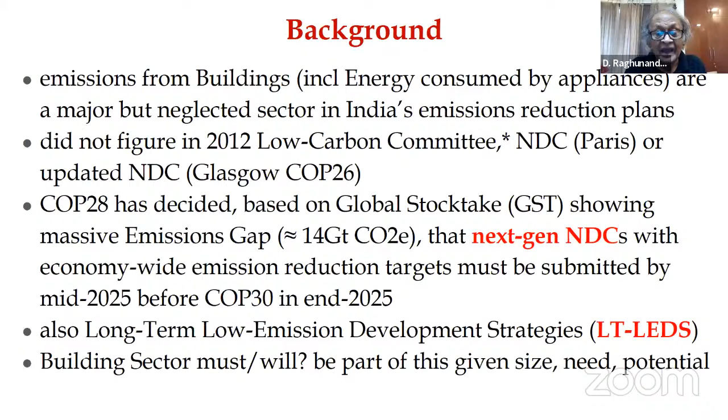And I can't see that we will be able to do that without taking the building sector on board, because buildings are a major part of the emissions profile of the country, which is currently about 25% of total emissions. And this is in a context where roughly 50 to 70% of building stock by 2050 is yet to be built.

We've got more than double of the building stock today still to come up, and we are already at 25% of total emissions in the building sector. I've given some figures here of emissions from buildings, largely drawn from C-STEP's study and modeling, which essentially says that almost the entire carbon budget—the amount of carbon India has between now and 2050, the space in the atmosphere—will be used by the building sector alone. Or since it will not be, that means we'll exceed our carbon budget by a lot, and that's clearly not going to be allowed by the international community.

When we talk about the building sector, I want to emphasize that building sector emissions consist of two parts. One is what's called embodied emissions—that is, emissions contained in materials that go into buildings, into cement, concrete, etc., and emissions from the construction industry, the transport of these materials, the removal and handling of waste and so on. These are called embodied emissions.

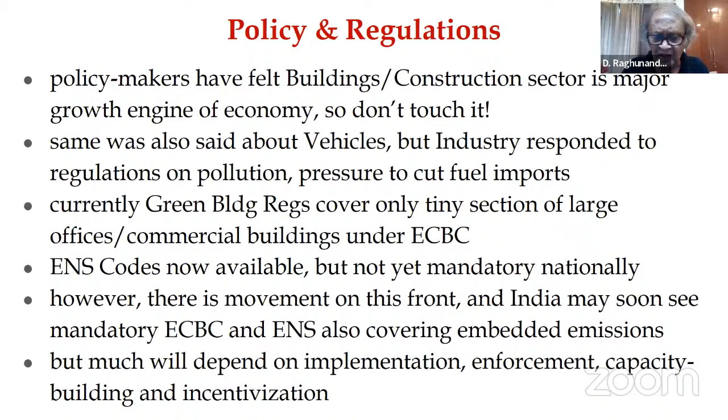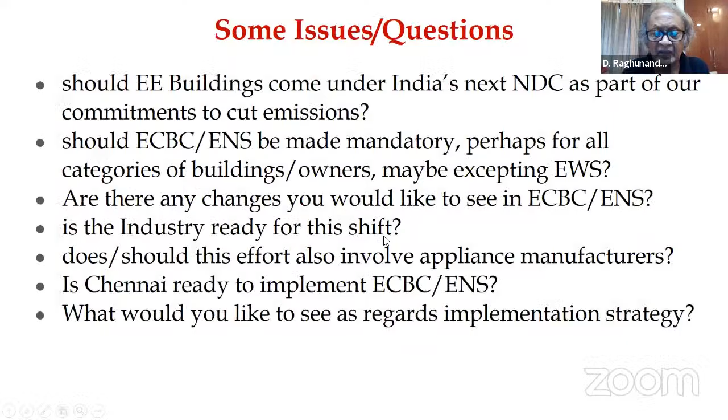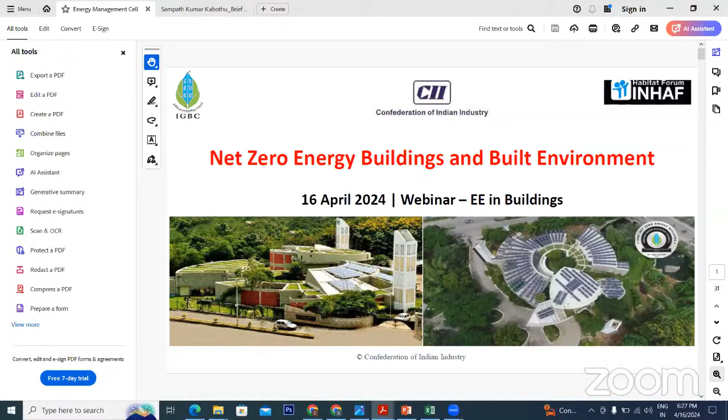Sir, thank you very much for offering this opportunity to CII IGBC for this presentation on net zero energy buildings. I hope you are able to hear me. Yes, yes, we are, please go ahead.

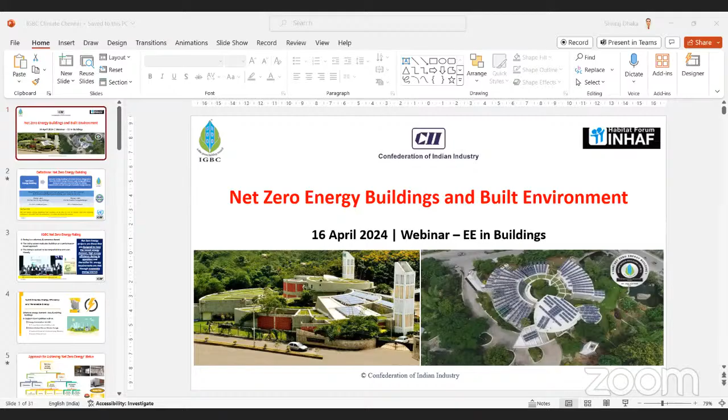This presentation is primarily about net zero energy buildings and the built environment. I got a message from Raghunandan sir that I should cover several parts of net zero energy which can make sense for Tamil Nadu or Chennai with regard to climate mitigation. So I've tried to cover several points, but I don't think one can do justice in 10 minutes covering every part of energy efficiency in buildings. But let me run the presentation. If you find any difficulty or need clarification, we can have a Q&A session.

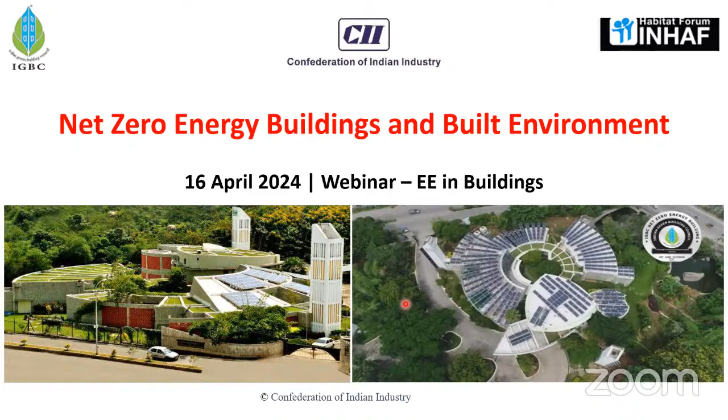The building you see here was the first green building in the country, and this is the headquarters of IGBC. When we started in 2001, this building was converted into green considering several measures. But in 2017-18, we realized there are many technologies available in the country, many more advancements which could be put into practice. So this first green building was converted into a net zero energy building after a lot of retrofitting of the completely air-conditioned system it had in 2001. Earlier the photovoltaic didn't completely cover the top, but later bifacial solar photovoltaic was installed. A bifacial system generates more energy compared to a conventional solar photovoltaic system and covers less space. So there are many advantages to bifacial. This is the journey we've witnessed from green building to net zero energy building, and this presentation will showcase how it can become a story for every building, not only our office, but a true message for every building with regard to net zero.

Then highest energy efficiency would be the focus for every building during design as well as in operation. After defining energy efficiency in every building, whatever is left out, this energy should come from renewable energy. So this is the definition IGBC has defined.

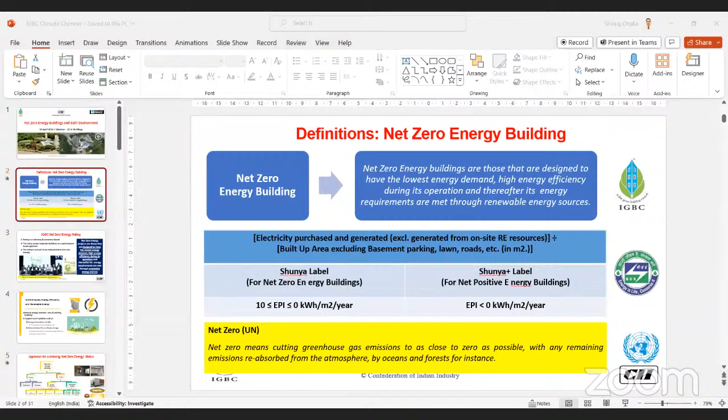But if you see the Bureau of Energy Efficiency, which is the nodal agency for improving energy efficiency all across the country, for the building sector as well as the sectors in industry - let me also jot this just a second - Bureau of Energy Efficiency mentioned that any building which just relies on a renewable source, but is only able to meet out or offset some part of it,

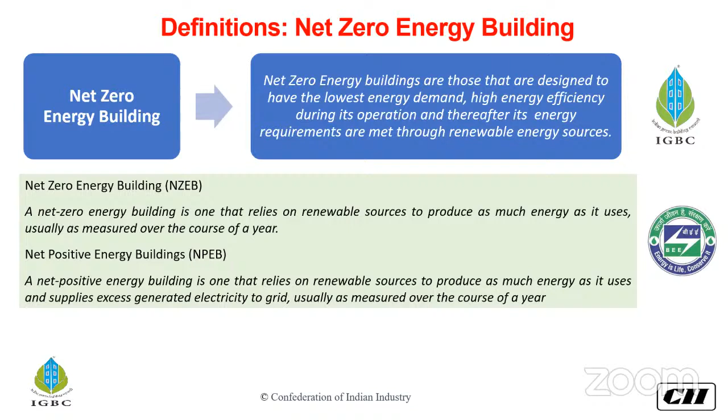it can become net zero energy. But some buildings surpass the total energy required for a given building and produce much more than the requirement - these buildings can also become net zero energy positive buildings.

If you see IGBC and Bureau of Energy Efficiency, both give huge importance to energy efficiency and renewable energy. But Bureau of Energy Efficiency has defined what building can be called net zero - the Shunya label is like the net zero building - through their energy performance index.

Energy performance index is very simple. We should have the total energy consumption for a given building and divide it by the total built up area, for our home or for commercial buildings. This should be less than 10 for commercial buildings, and for residential buildings it could be a little less than 10.

With regard to Shunya label plus, or net positive energy buildings, this EPI would be lesser than 0. This means whatever renewable energy we generate would completely offset the energy demand, but would also generate a little more than our requirement.

You can also find many other definitions. This one is listed from the United Nations, but the UN doesn't talk about net zero energy - they talk about the total carbon offsetting by any source of energy users.

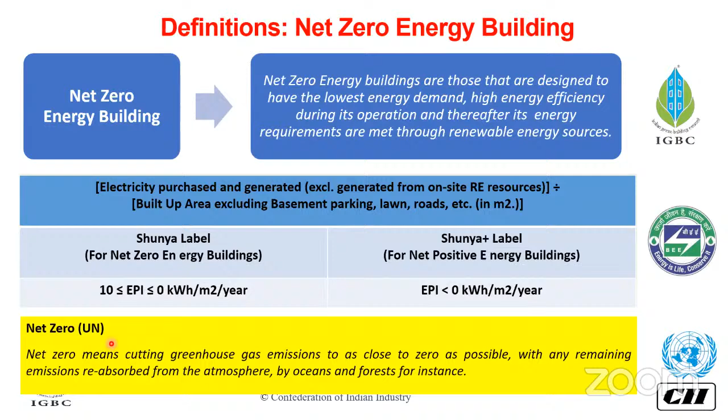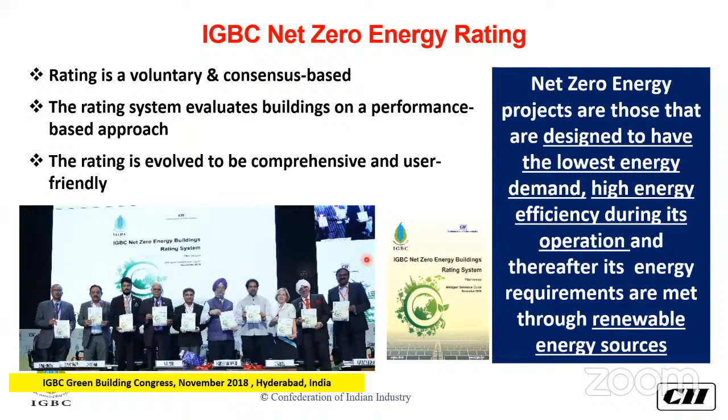This presentation would be shared with the team so they can circulate it with all the stakeholders. This net zero energy concept was launched in 2018, and today we have many projects all across the country. I will also showcase some case studies during my presentation.

So when we define net zero energy, our thought process was that this should also address several policies which are there in the country. Primarily, when we talk about net zero energy, we are also talking about energy efficiency and renewable energy. So energy efficiency is well defined under the Energy Conservation Act 2001.

ECSBC will not only address the energy part, it will also address water, building materials, indoor environment quality, commissioning of equipment, and how sustainability can be achieved through site selection or planning. So all these parts which are there in green building will also be part of the ECSBC, which would be revised very soon by the Government of India.

The second part addresses climate policies which are there on energy efficiency as well as renewable energy. So while adopting net zero energy, we are really confident about having huge benefits with regard to energy savings and having more and more penetration of renewable sources in every building typology.

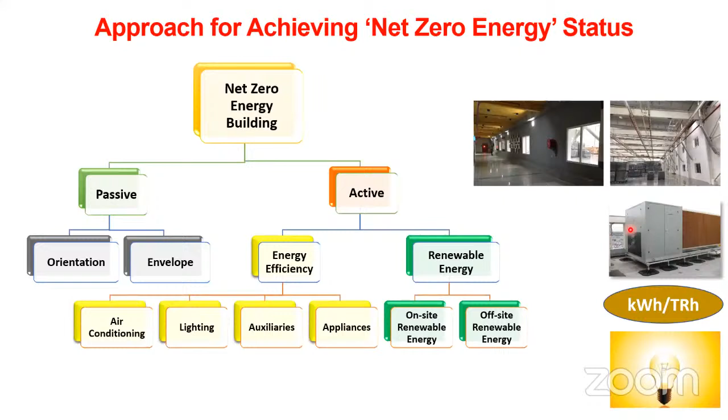I have put couple of things. This is also a passive strategy, like there are light pipes which are installed into the project, and these light pipes, they reduce the use of artificial light in corridors. Then there are some passive elements, although it would be difficult to use them in Chennai, but yes, they can also utilize good efficiency into the project.

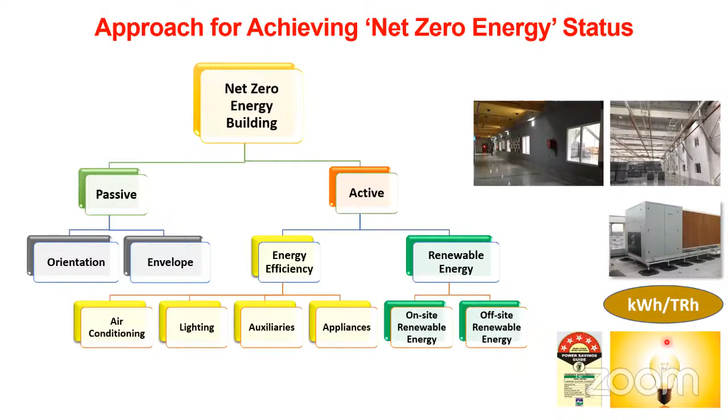So when we have a net zero energy certification, we consider several parts, and passive is by default integrated for new buildings, but primarily when we see the building growth, even Dr. Raghunandan mentioned like what could be the strategy for 2050. So today we have lesser new buildings and many more existing buildings. So there could be huge retrofitting opportunities for these buildings to become and demonstrate net zero energy. So we give more than 75% of weightage to energy efficiency alone, because energy efficiency pays back from day one. And then also try to fit like which retrofitting options can be better for the project.

I have showcased something here. Like many a time, old buildings they do have centrifugal fans, and today, most of the projects or most of the air distribution system wouldn't have a centrifugal fan. Either they have the EC fan, or more than EC, they would also have zero energy fan or axial fan, which doesn't have any energy losses there. You can also find like how they will have the smooth airflow. This is one example of like centrifugal airflow.

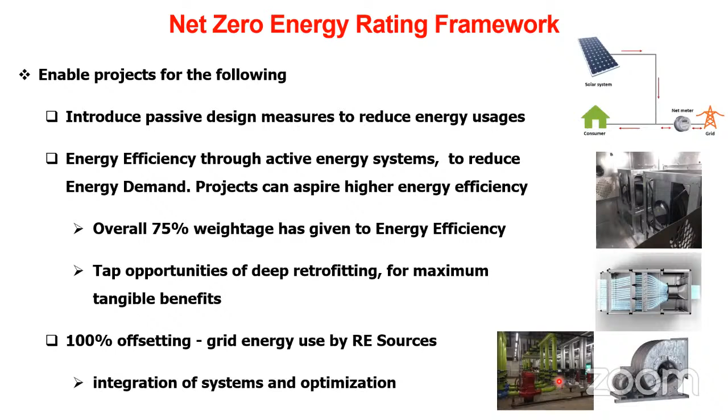And these are like pumping solutions which are really, really efficient. And there are a couple of companies, they are based in Chennai, those are offering this kind of solutions. So this is how we segregate them.

Let me tell you like how energy efficiency happens, which is having highest weightage in net zero energy. Some of the buildings, those we have rated, they were like having very, very high energy performance index in 2010. They did gradual improvements, slowly they had many retrofitting. And today their energy performance index is like less than triple digit, which is like 90 kilowatt or lesser than this.

Another message we would like to give you is like when we have renewable sources, it is not only like 25% weightage of renewable, but it is the overall weightage of 100-point scale into renewable energy for 25%. But it must have 100% of the requirement for a project to offset the grid energy used by renewable. It can be on site having net metering policies. Tamil Nadu is like good state with regard to solar policies. And second thing, if energy demand is so huge, cannot be computed by on-site, it can also have off-site by having wheeling also.

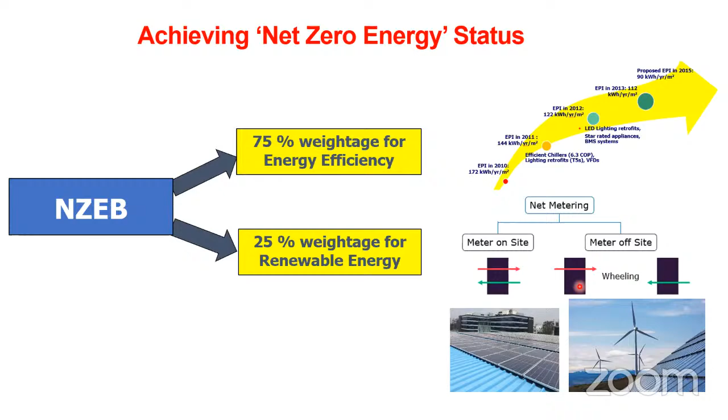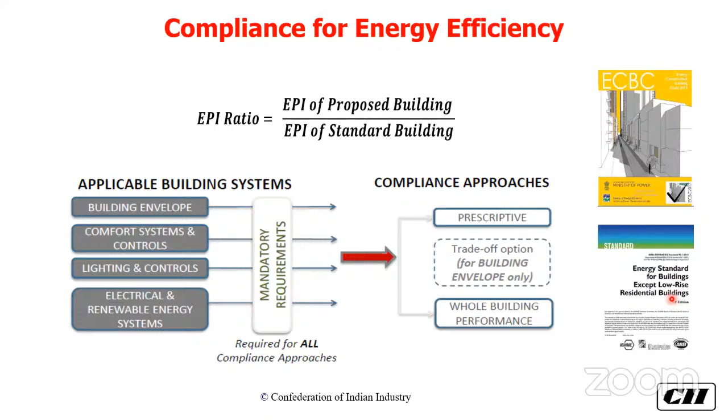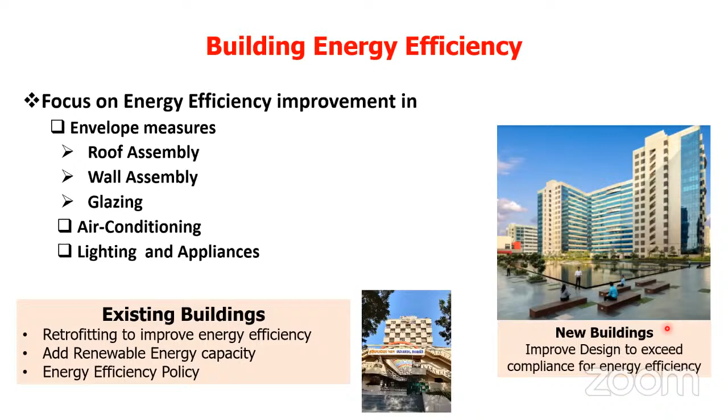When we talk about energy efficiency, there's the building envelope—roof, wall, glass—and then air conditioning and lighting. But with existing buildings, there are more energy efficiency implementation opportunities through retrofitting, and also to add renewable capacity. New buildings obviously have more design interventions, and these showcase how they perform better compared to older buildings which are not meeting code compliance.

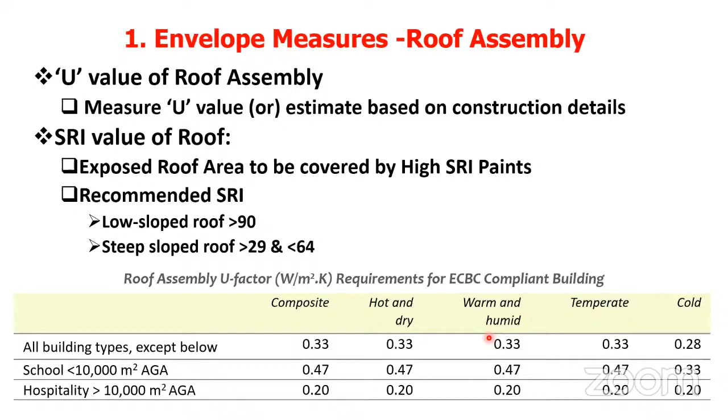These insulations can be created by many different options. Sometimes you don't need insulation—it can just be an air cavity. Sometimes an air cavity can be combined with a different type of insulation material, which are well known in every climatic zone or city.

Most of the time we design for worst conditions, but worst doesn't occur every time. So we should design buildings for part load efficiencies also, so that we get more benefit from the cooling savings.

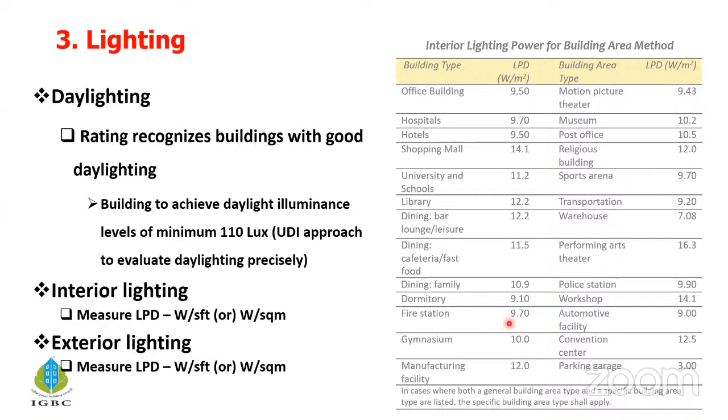Another part is lighting. Lighting is important because every space needs either artificial or daylight, or a combination of both. So we recommend having a lighting power density, which is defined for different building typologies in ECBC. It can be referred to—it's available online for everyone.

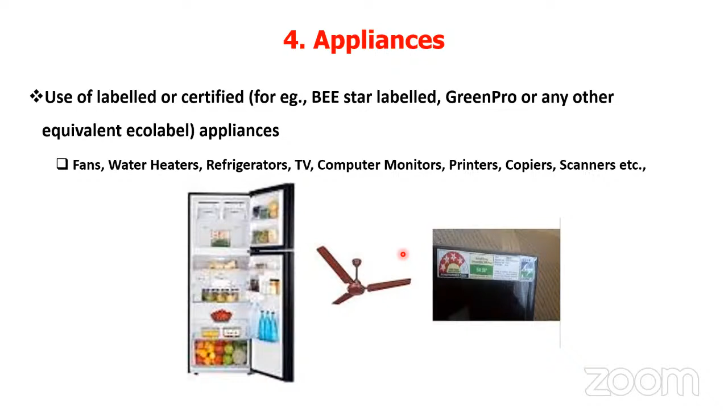The main advantage of using appliances with a star label is that every 2 years these labels are modified and upgraded. So whatever you purchased that was 5-star about 2 years back wouldn't qualify for 5-star now—it would become either 2-star, 3-star, or may not even qualify under the criteria developed by the Bureau of Energy Efficiency.

So let us understand how to calculate EPI to demonstrate whether a building would meet ECBC or not. Let's assume we have some energy consumption evaluated for a design case—this is the actual energy consumption for the building.

We have a built-up area of 2000 square meters. If we divide the total energy consumption of 130,000 by 2000 square meters, we get a design EPI of 65. Then the actual consumption is 100,000; dividing again by 2000 square meters gives an EPI of 50. When we calculate the EPI ratio—actual versus design—we get 0.76.

This means 50 divided by 65 gives an EPI ratio less than 1. This means the building qualifies for ECBC.

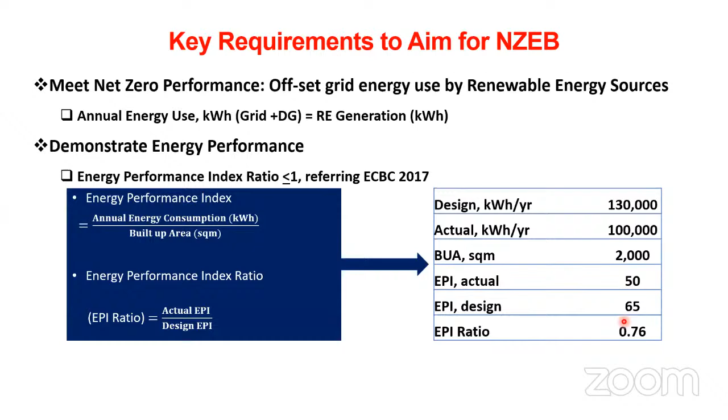This means this kind of building will not qualify, since it has more energy consumption in actual or proposed case compared to standard. So this building can't meet ECBC compliance. Here is a case which is the reverse of what we just discussed.

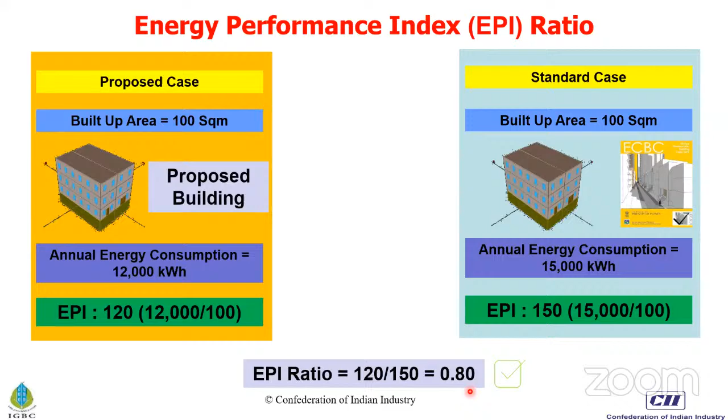It has more energy performance index in the standard case, like the ECBC case, than the actual case. So 120 divided by 150, your building is having EPI lesser than 1. This means this kind of building can meet the ECBC compliance.

Now let us talk about on-site and off-site energies. I'll run a little fast since I'm taking more time. On-site is one example which can have net metering and gross metering based on the policies which each state has. I don't think Tamil Nadu has any problems; it is very good with regard to policies for net zero or renewable implementations.

This is offsite. A project can put a plant outside their premises. They can have wheeling through the DISCOM or any renewable energy companies, and can wheel the power, which is green power, to offset the grid energy consumption.

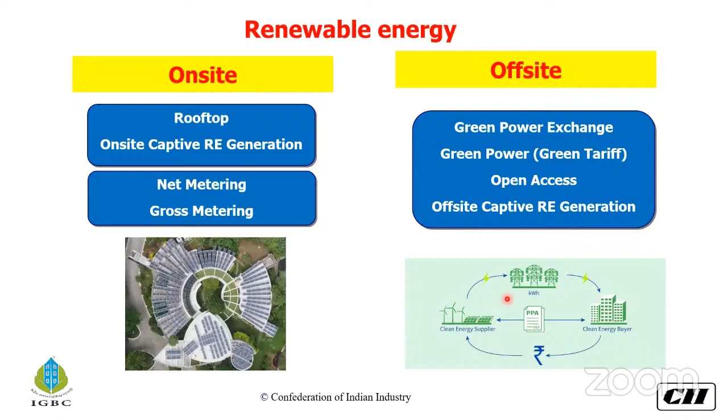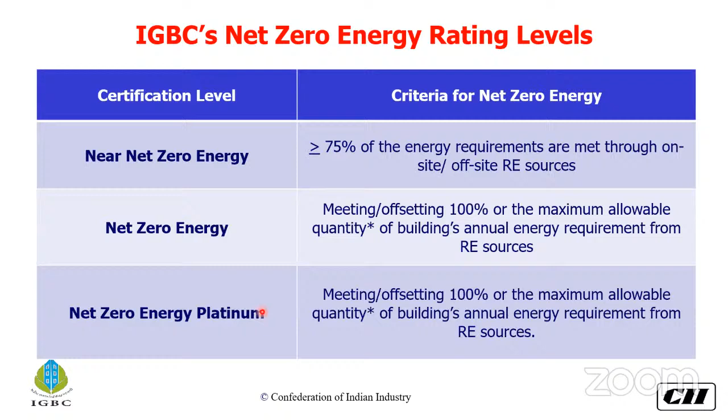So we have 3 thresholds defined for net zero energy. One is for any building which has 75% of its energy requirement met through on-site and off-site renewable energy; this building would be called a near net zero building. Any building offsetting 100% is called net zero energy, and net zero platinum means it offsets a little more than the actual requirement on an annual basis.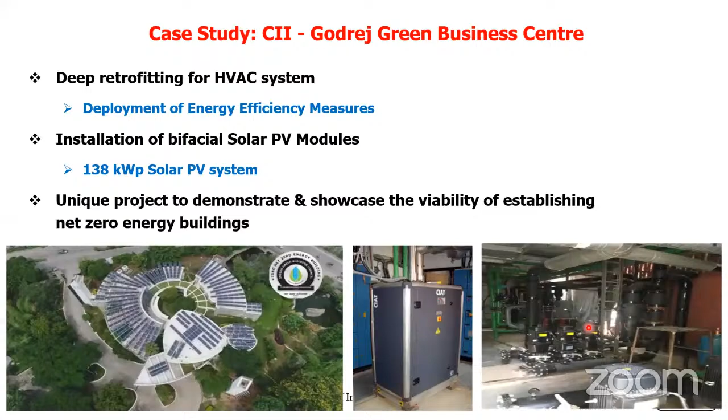You can see all the cooling systems we retrofitted with new ones, which are very efficient. But efficiency at 100% load isn't really important for us, because our office is never operated at 100% load. It mostly runs at 50-60% load or a little lesser. So we selected items which are best at part load.

This is the story of lighting. We retrofitted in 2017-18. You can see a number of lights, more than 211 fixtures, but when we retrofitted, we hardly had 86 fixtures, and their efficacy is very high. Efficacy is lumens per watt - earlier it was 60, and now it is 132. So this reduces the number of fixtures.

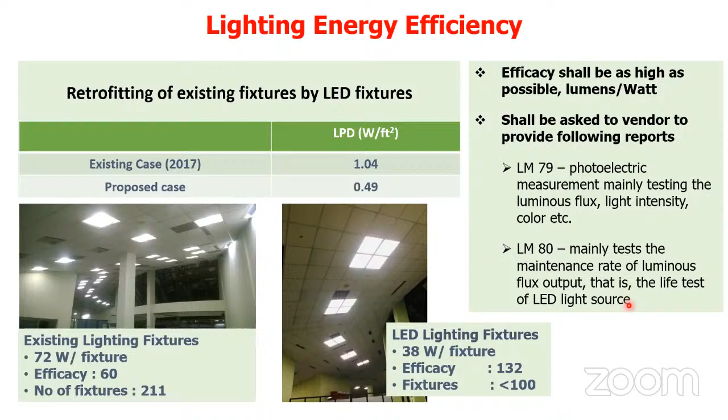Let me also remind you of one more thing. Whenever we procure lights, they shall be tested for LM79 and LM80, which gives guarantee for the life of the LED source - meaning it will burn for more than 45,000 to 50,000 burning hours - and also the quality of the light, so it doesn't blur or fail to last more than 1 or 2 years.

This is how we did the retrofitting. The temperature of the light was more than 50 degrees in case of CFL. In case of LED, it was less than 29 degrees. So this also gives savings on cooling - light not only saves energy for lighting fixtures, but also saves on cooling.

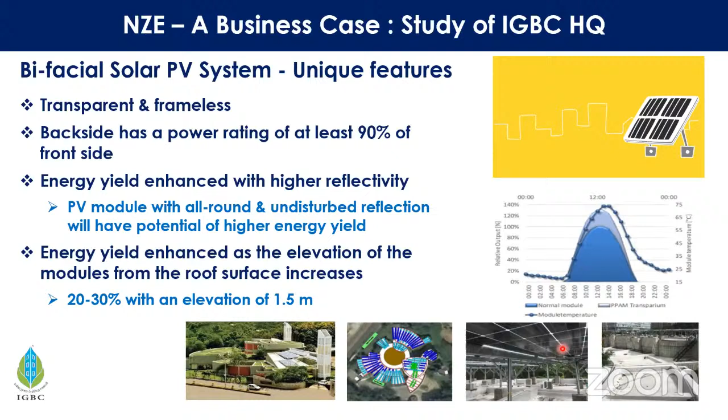These are the fixtures we put here for bifacial panels - you can see it. This is the rooftop, which is white colored. This white color produces diffuse radiation, which also falls back on the rear facade of the cell, so that cells generate energy from the top side as well as the rear side.

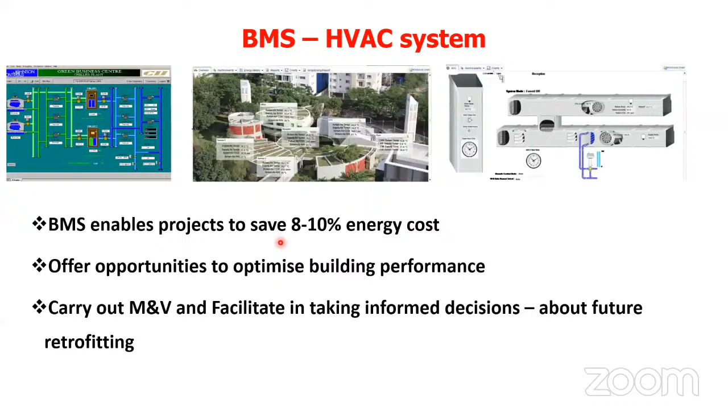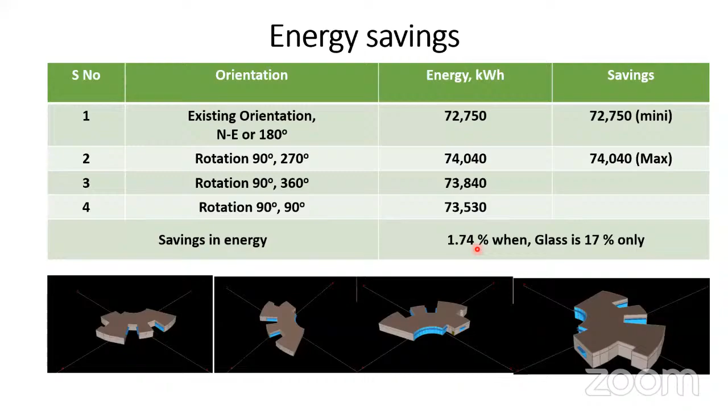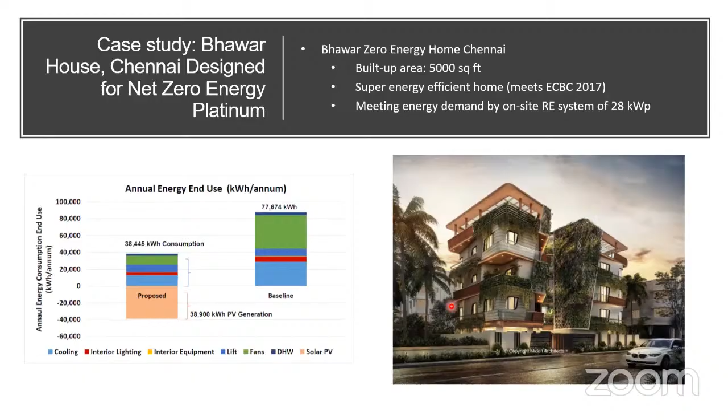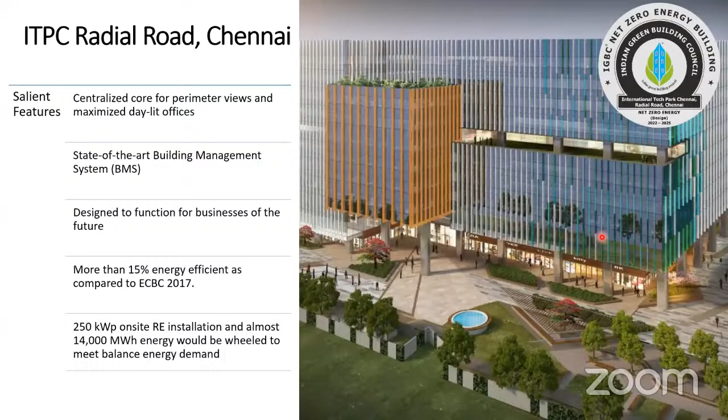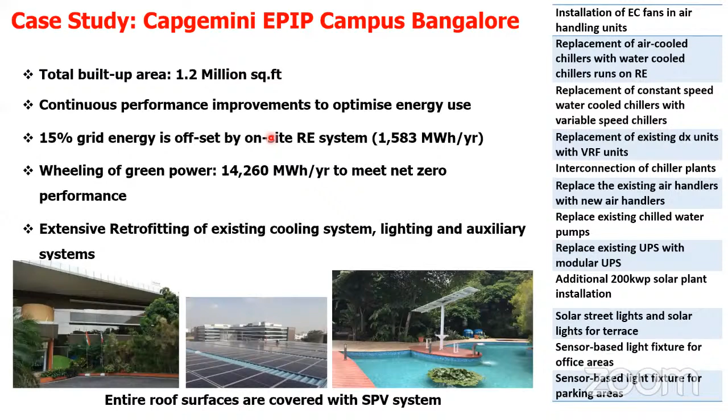They have invested more than 21 crore rupees to retrofit several items there, and try to improve the energy efficiency. The rest of the energy comes from on-site and off-site sources. So there are many good things happening in Tamil Nadu, but many more things can happen through adoption of net zero energy. So this was the presentation about net zero energy.

If you have any doubt or need clarification, I would be really happy to help. Thank you, sir, I hope I didn't take too much time, I'm sorry. Not at all, thank you very much. Perhaps even though you're traveling, if we have some questions that need answering, we'll come back to you later. Absolutely, contact me, no problem, over the phone.

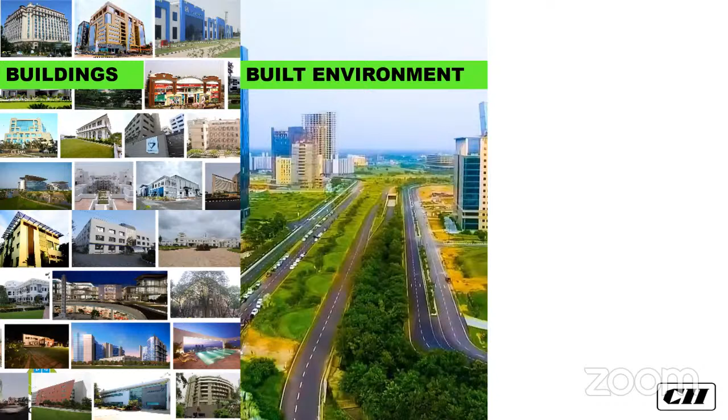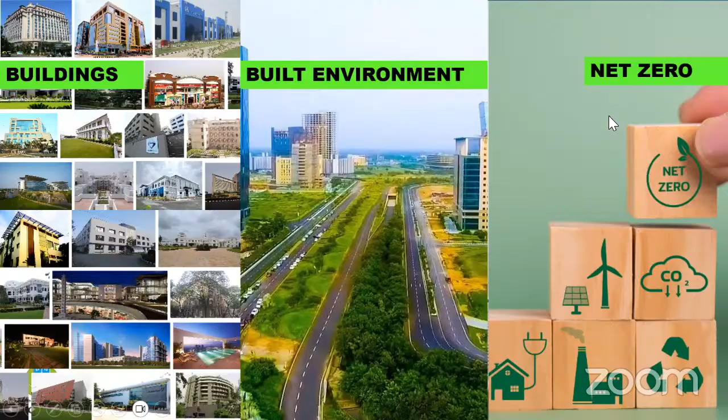Let me share a few slides about our own journey. We started working on buildings, moved on to built environment, and then realized we need to work on net zero buildings with a mission mode. I'm glad to share that with our own center being the first platinum rated building and net zero energy building, we now have more than 13,000 green building projects with about 11 billion square feet.

But the message from this slide is we started working exclusively on net zero projects, and I'm glad to share that we have 100 plus projects working exclusively on net zero. This number appears small, but we are getting many queries. Earlier, a couple of years back, we used to hardly get a query on net zero, but today we get more than 5 to 6 queries on net zero projects, which is good.

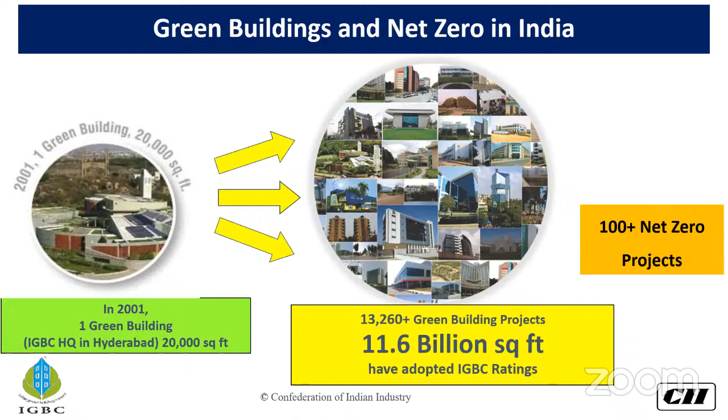We're trying to understand the challenges, opportunities, and policy changes we are looking for from different states or central government. All of this is helping us work toward net zero.

IGBC has launched a mission on net zero. We thought we should facilitate the net zero movement in a holistic way. In 2021, on Earth Day, April 22nd, we launched IGBC's mission on net zero with a vision to facilitate India to become one of the foremost countries in transforming to net zero by 2050. India is one of those countries working on net zero buildings in all aspects - energy, water, waste, and carbon.

When we launched this, over a period of time we had a commitment from over 350 organizations to achieve net zero status for their new and existing buildings. Of course, many of these organizations are yet to demonstrate their buildings as net zero, but they made a commitment that they will start now, and sooner or later want to become net zero.

As mentioned earlier, we have launched exclusive rating tools for net zero energy, net zero water, net zero waste, and net zero carbon. For a period of 5 years, we took feedback from industry leaders, experts, projects, consultants, manufacturers, and academicians on different subjects, and then developed these rating tools slowly over that period.

The intent was that the industry should look at energy, water, waste, and carbon. And of course, carbon we're looking at in a holistic way, because it's not just energy which will reduce carbon emissions - there's a nexus between energy, water, and waste. That's what we're trying to focus on with net zero carbon.

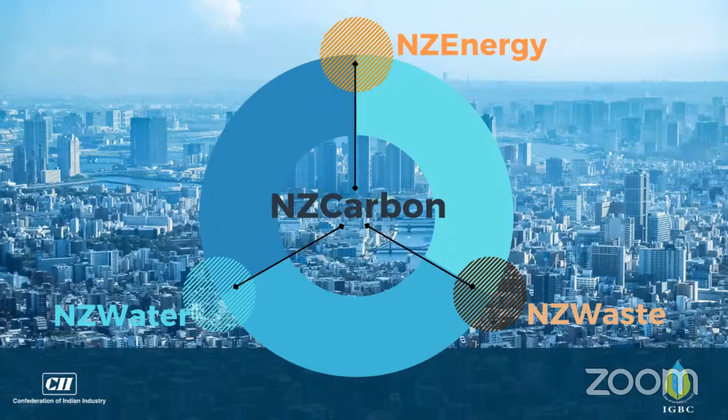But today I would focus on water. Water is directly linked with energy - the more water we use, the more energy consumption, and the more energy consumption leads to higher carbon emissions. So what are we trying to look at? What is the approach and methodology we have for projects, and how they can look at net zero water?

Particularly Chennai is very unique - we have seen floods where we have a lot of water, and at the same time we have water crisis in Chennai. So it's a very unique scenario which we look at, particularly from Chennai and other parts of Tamil Nadu.

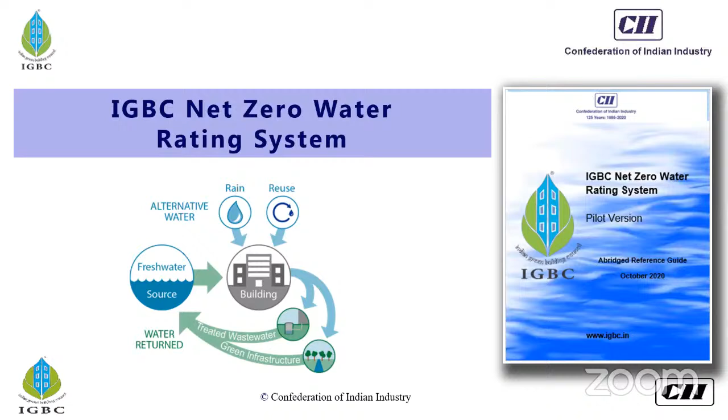Let me share some of those concepts which can be considered by the projects. For any net zero rating when we developed it, the first thing we looked at is the definition, because that's what we have to focus on to define how we can address the projects from net zero. So what we have defined as net zero water, based on consensus and views received from industry leaders and experts, is that net zero projects are those that consume minimum raw water.

Some important things I've highlighted: minimum raw water and produce alternate water to meet the balance requirement. That means we use minimum water and produce alternate water to meet the balance requirement, and then give back alternate water to original sources for use, so that the net annual water consumption is zero.

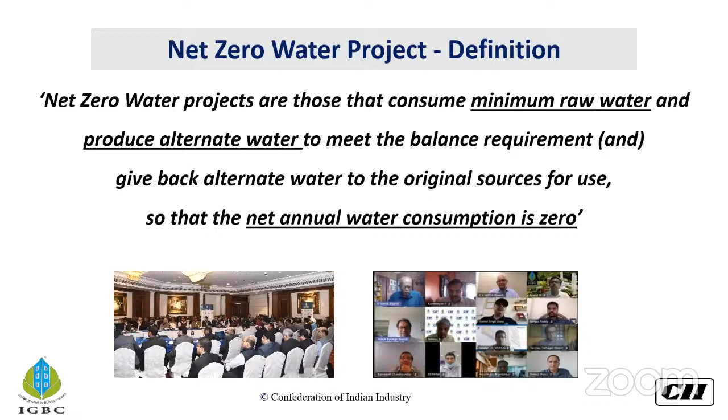The definition might be complex, so I'll try to simplify this. In a nutshell, what we're trying to say is we have to know what our total water consumption is. And then we have to know what alternate water is being used or harvested, so as to figure out what the raw water consumption is.

So for this, first of all, the foremost thing is, like similar to energy meters, we need water meters. And this is one of the biggest challenges we have when we ask projects, do you know the water consumption for each of the applications? For example, do you know how much raw water is used, how much treated water is used, or how much water is used for cooling towers, flushing, landscaping, or other major applications? The answer is yeah, we know the total water, but we don't know the breakup. So what I'm trying to say is, unless we measure what is being used, we can't enhance the performance.

So we have classified what is raw water and alternate water so that projects know very clearly how we can look at it. So a combination of raw water and alternate water gives us the total water consumption.

So the raw water, which we typically know, is municipal water. Even borewell water, if it is potable, we still consider it raw water because it is taken from the mother earth.

And then, of course, the alternate route is tanker water, which is being purchased, particularly in these months of summer, and it is in huge demand. And we are seeing the news day in, day out in different cities like Bangalore, Chennai, Hyderabad, and many other cities.

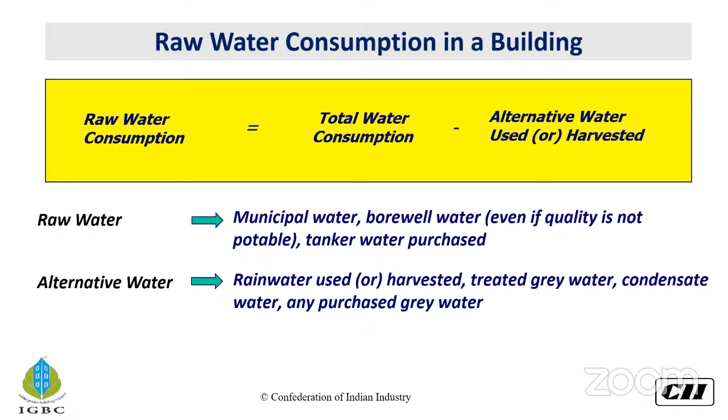And alternate water includes rainwater which is harvested, that is the stored water, or the treated grey water, and some projects where cooling towers are used for AHU makeup, where we have the condensate water, or even from the AHUs which are used even if air cooled, and any purchased grey water. Some of the authorities, they sell the treated water for projects to use, not only for construction, but for building use, the regular operations as well.

One is water performance ratio, and the other is water back to source. Water performance ratio and water back to source, so these are the 2 important parameters. I'll get back to these numbers a bit later. What is water performance ratio? My colleague Shivraj explained about energy performance index, which is like energy performance ratio, which we can relate to water performance ratio.

So what we are defining as water performance ratio is alternate water consumption to total water consumption. We have understood what is alternate water, so we're trying to come up with the ratio of alternate water to total water. So once we know this, we may find some number which is maybe 0.5, 0.6, 0.7, but we need to know where we are so that we can take measures to enhance the water performance ratio. The water performance ratio should be higher, the better.

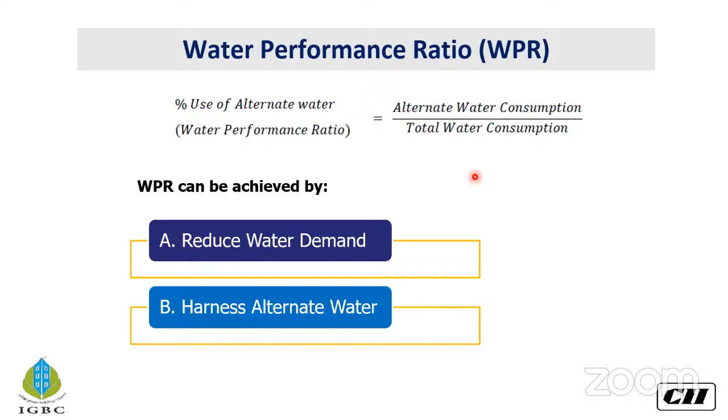So how we can enhance the water performance ratio is by reducing the water demand. Like how we were talking about energy demand, we have to reduce the water demand, and by harnessing alternate water. So let me get into a very high level overview of how we can reduce water demand. The first and foremost is having a water management system. We all heard about energy management systems, but there's a lot of demand for water management systems now.

So these water management systems are a dashboard wherein we have digital water meters, and every second, every minute we get the data from these meters for different applications within the buildings or within the campuses to figure out what is the water consumption for different applications and what is the total water consumption, and for what applications in which buildings, everything will get to know. So that water is monitored every minute, so we know where we are with respect to the benchmarks.

And then water efficient fixtures. This is the most important thing. First, unless we have efficient water fixtures, we can't reduce the water consumption. We have heard many projects saying we have a lot of treated water, so we are not worried about using water. But even if you have excess treated water, we need to conserve water, and what is excess treated water can be donated or supplied for other buildings or other applications, so that overall water demand can be reduced. So having water efficient fixtures for different applications.

Like we have conventional urinals, we can retrofit with sensor-based urinals or urinals with efficient aerators or waterless urinals, so that we are avoiding the water completely.

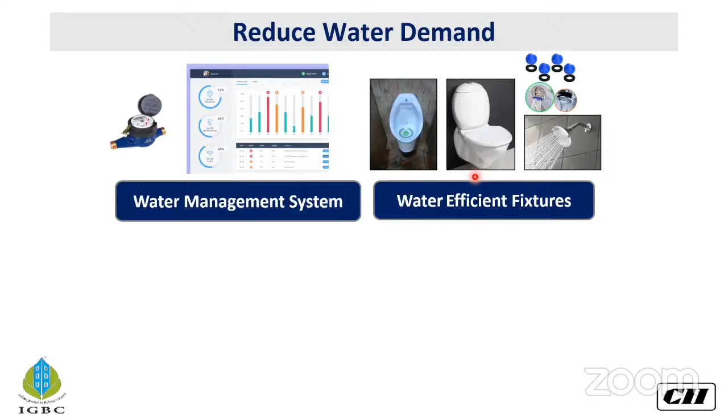For health faucets and shower heads we have seen 10 to 15 liters, which can be reduced to as low as 6 to 8 liters. So there are different ways and means to reduce water consumption through water efficient fixtures. That's what we are trying to say.

And then water efficient landscape and irrigation systems. We have seen several projects where they have beautiful landscape, but they are water guzzlers. They consume huge quantities of water every day, particularly in the summers. So first, we have to choose plants which consume less water, and we call them drought tolerant species or native species, or we have xeriscaping, which means the water consumption by these plants is very minimal.

On top of it, if we can add irrigation systems like sprinklers, drip irrigation systems, timer-based controls, pressure regulating valves, moisture sensor controls, this will further reduce the water demand. So in a nutshell, we have to have different strategies to reduce water demand so that overall water consumption in the project is reduced.

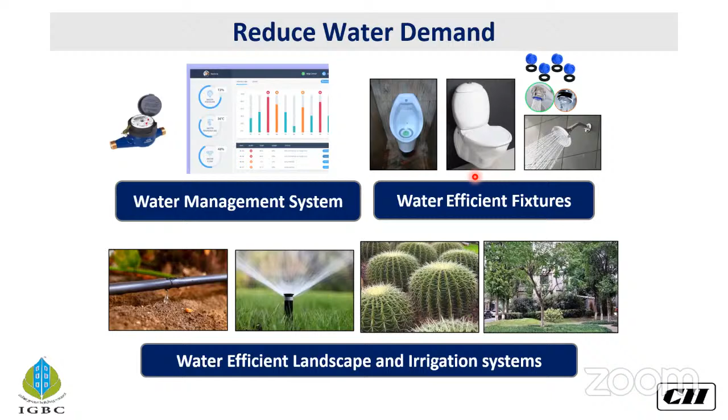Assuming a project is consuming 10,000 liters of water per day, what can we do to reduce the 10,000 liters of water per day, say to 8,000 liters or 6,000 liters? That's the first thing which we need to look at.

And then, whatever wastewater is being generated, if a building consumes say 10,000 liters of water, and assuming there are some losses, say 9,000 or 9,500 liters of water is going into the wastewater treatment plant, excluding the water used for drinking and landscape applications. So how can we treat this water efficiently?

We have seen several projects where one, they have STPs which don't operate, or they have STPs which operate at about 25 to 40% efficiency, or at max 50% efficiency. What can we do to improve the performance of these wastewater treatment plants so that 70 to 90% of water is treated, and that water is again reused for different applications?

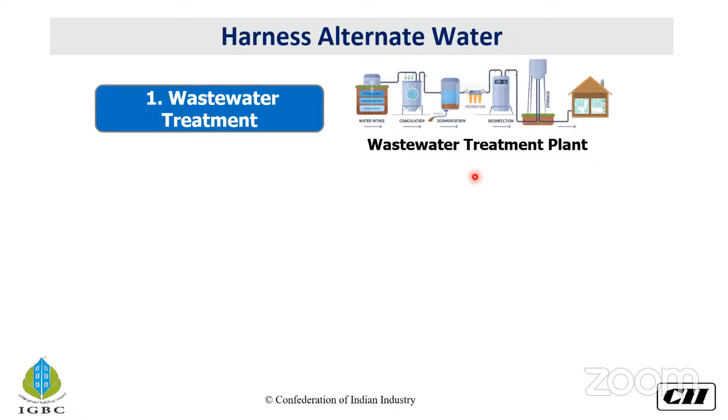So the water should be treated to tertiary standards or secondary level. For example, secondary level can be used for landscaping as it is, but tertiary level we can use for flushing and cooling towers also, so that overall water demand can be reduced.

And then storage of rainwater. We have seen several projects again where they have very minimal storage capacities, or they don't have storage capacities at all. But we recommend whatever is possible. We're not trying to say harvest all the water, but whatever can be reused for that particular day or the next day, those quantities can be stored, because unlike energy, water is not priced the same way.

But the moment water is being priced, the emphasis is more towards water. When we look at the math with respect to the water being supplied by the municipality, which is bare minimum cost versus the tanker cost, or when there's no availability of water, that's when we'll value the water. So the storage of water plays a big role even when there's rainfall. That water which is being stored can be used on the alternate days.

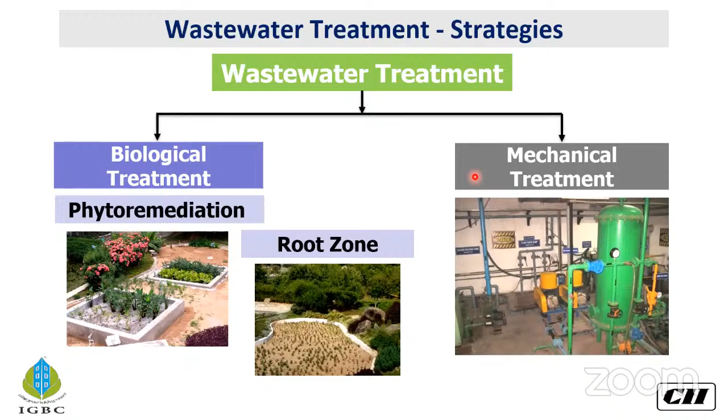So wastewater can be looked at in different ways. We have the conventional ways of biological treatment, phytoremediation, reed bed systems. I won't go into details, but these are natural ways of treatment where we use plants to treat the water. And then we have mechanical systems, high-end mechanical systems where the water can be treated to 90 to 95% efficiency as well. And rainwater harvesting, we know these measures, we can collect water in a pond, even in campuses, or storage tanks, even in a residential building or a residential bungalow.

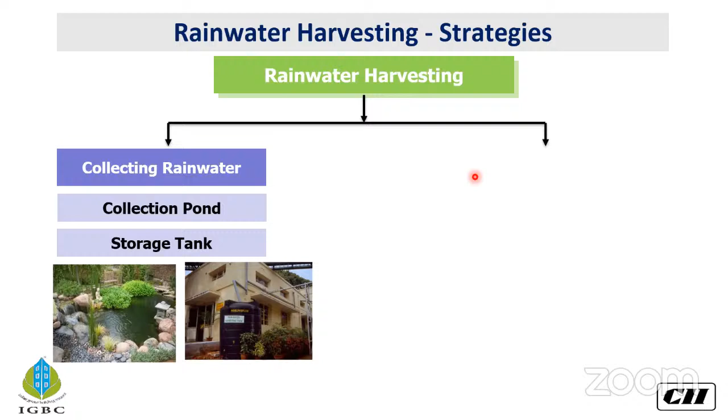And then percolating water to the ground. This is something which is done very well in most of the projects. And in some of the projects, we just have a pit, that's it.

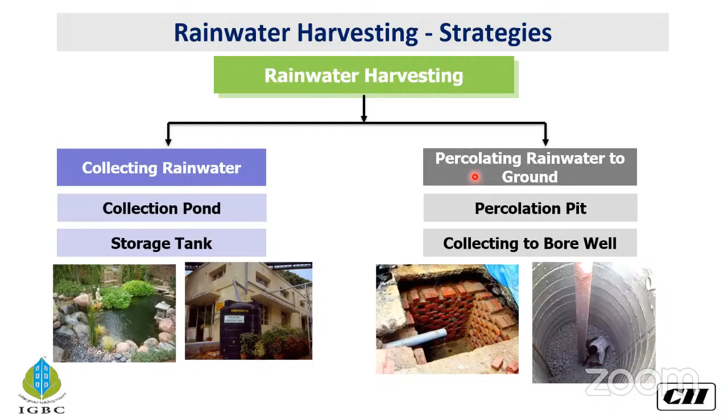If you look at the other ratio, water back to source, we have water performance ratio, and water back to source ratio, which is water recharged vis-a-vis the total raw water consumption. Whatever raw water is being consumed in the project, in addition to alternate water, if that equivalent of water is recharged to Mother Earth, meaning whatever water we take we give back, then we can look at it from a net zero perspective. Let me explain water back to source.

We discussed a while ago about rainwater harvesting, where recharging is one of the strategies. So recharging can be done.

If you have excess water on a daily basis, particularly in residential communities, they use more raw water for domestic use, and they have excess water which may not be reused for flushing or landscaping. That excess water can be donated, or even sold to others who require it, preferably through a piped connection, or through tankers if there's no alternative way to divert water. We need infrastructure from municipalities to supply this treated water to all buildings, whether commercial, residential, or industrial. Even donating this water for a useful purpose can be considered water back to source.

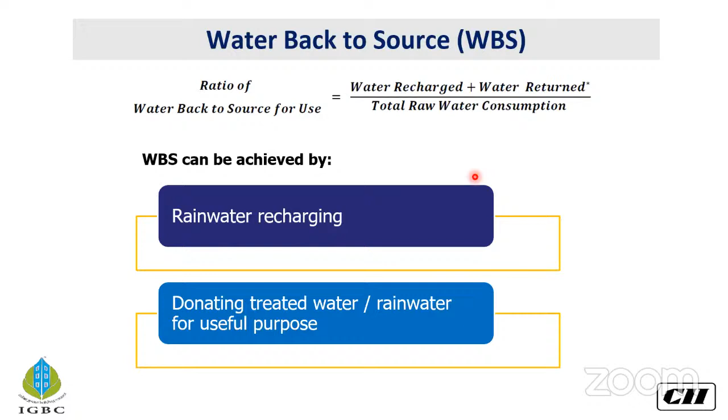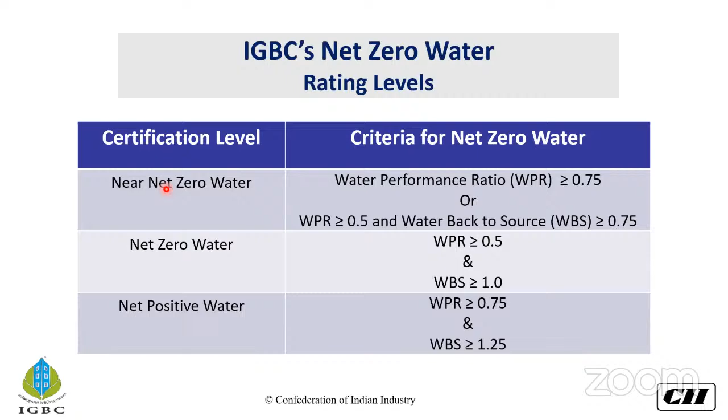Coming back to near net zero and net positive, we were discussing water performance ratio and water back to source. We've put some numbers based on feedback from projects and our own analysis. If projects have a water performance ratio of 0.75 or higher, that's when we can start looking at net zero, near net zero, or water back to source of minimum 0.75, in case they're not looking at water performance ratio. I'm not trying to focus much on the numbers, but there's a strategy to look at in terms of water performance ratio and water back to source, so projects can achieve near net zero and net positive status. We have several projects now taking this challenge to become near net zero or net zero, and very few projects achieving net positive.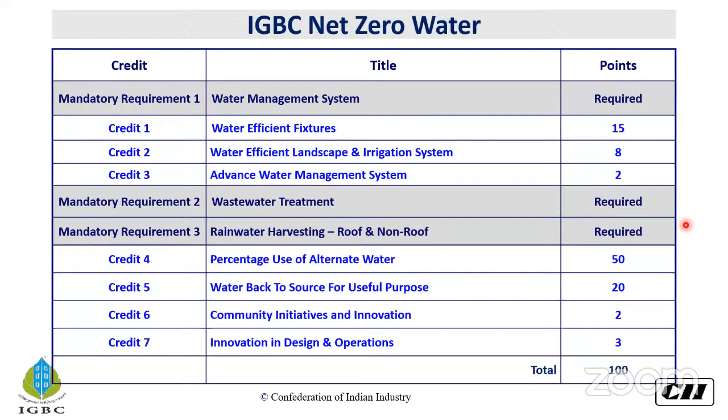So we have come up with a checklist. I won't get into the details, but the message from these slides is that it's not just one strategy to become net zero. There are several measures to be considered, and we've put in weightage for these measures on a scale of 100, so projects can look at all these measures and see how they can achieve net zero water for their projects.

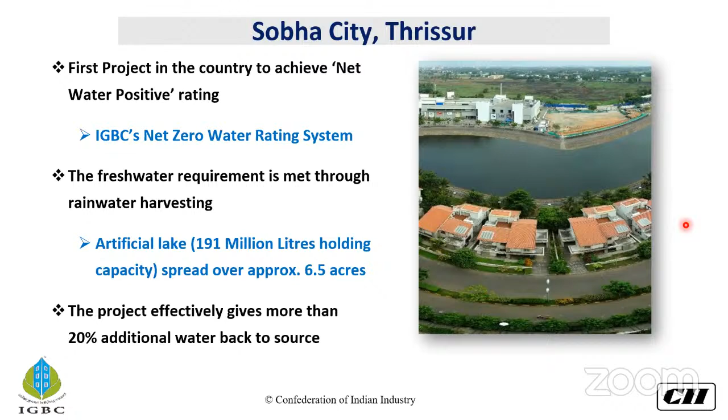Let me quickly share a couple of case studies so you can understand how projects are approaching this. This project, Sobha in Thrissur, is the first project we've certified as net water positive. This project is in the state of Kerala, where there is abundant rainfall. But taking that into account, the project made a man-made lake to harvest rainwater, about 6.5 acres, which will shrink when there's no water and fill up when there's a lot. They are holding about 191 million liters of water. This project could have made other units and more money, but instead they made a huge water body to harvest water, which is supplied to the dwelling units and further applications. This project effectively gives 20% additional water back to source, in addition to what they've already consumed, which made it a net positive project.

Another project in Chennai, Radial IT Park, which my colleague already mentioned from an energy perspective, is very unique because they achieved net zero water for design, and the same project has also applied for new building rating for platinum.

They got decent infrastructure from a water perspective, but then when they started looking at net zero water, the perspective changed because the criteria we were looking at was far more stringent for the project to comply. For instance, they had only 14 pits earlier, and they had half the size of the pits. We had to make them increase the size of pits and also increase the number of pits to 28.

Now they are able to harvest about 15,000 cubic meters of water annually. And then they have an STP which was working for the project, which is platinum rated and net zero. But again, what was the difference was the storage tank. There was about 250 cubic meters, but they had to increase it to 1,000 cubic meters so as to store the water and reuse it in the building.

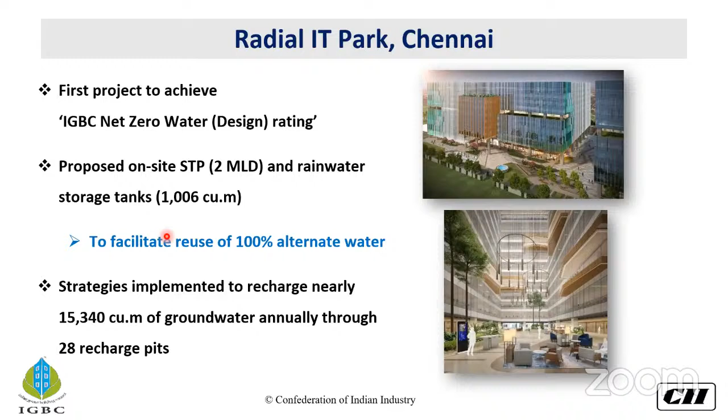So what we are trying to say from this is, conventional projects, when you're looking at net zero water projects, they have to look at it in a different perspective. That's what we're trying to say here.

There are quite a lot of organizations which have taken up this challenge. They have taken pilot projects from energy, water, waste, or even carbon now, including L&T, which is based in Chennai, the headquarters for L&T construction. So different projects have taken the challenge. The message is, some may look at priority as energy, some may look at water, some may look at waste to landfill or carbon, but somewhere we need to start. So what is relevant, what is applicable can be taken into consideration.

Certain projects can't take up net zero water because they have limitations in site conditions or the infrastructure which is there locally. Or say energy, even if they want to become net zero energy, the local policies may not favor it. Or if they want to become net zero waste to landfill, they are doing very good, but they don't have recyclers who can take this waste and process it. So we can look at what is more realistic and then look at how we can become net zero in energy, water or waste.

To sum up, this is an excellent opportunity to demonstrate leadership in net zero for everyone, but we need to start somewhere so that we can benchmark and then make others embrace net zero concepts. There's a clear demonstration of operational cost savings, and green makes business sense, but net zero makes all the more business sense for the projects. And more importantly, whoever is embarking on the net zero journey will contribute to India's commitment to become net zero by 2070, which the country has committed.

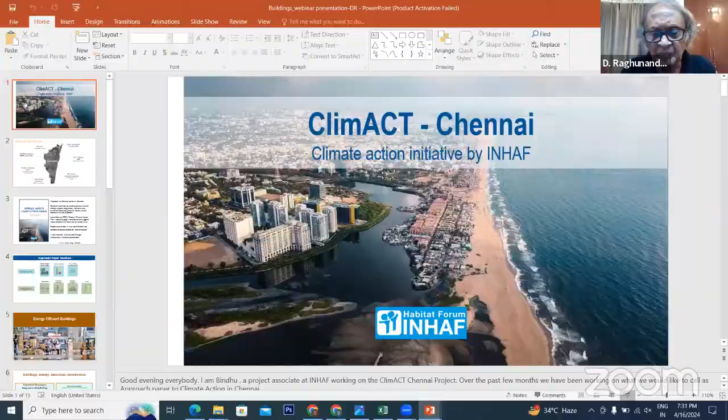May I ask my colleague Chitrakshi to please share my presentation, the last one. I'd like to share with you some of the work that we have done on this particular aspect. I am stepping in on this because our researcher who had worked on this, on the buildings sector, Sai Varshini, has left for higher studies abroad in Germany. And since I was sort of helping steer the project in all the sectors, I thought I could step in and do the presentation on our behalf, because the others on our project were not feeling that confident in the sector, not having worked on it. So I'll make this presentation fairly quickly.

Next, please, we don't need this. So this is basically what we have done in our study, which we call the approach paper to climate action. That's available on our website, you can see the address there below, where we have looked at the existing context, climate change impacts, adaptation, resilience, and emissions reduction potential across different sectors. We've also taken into account the Chennai Corporation's climate action plan and looked at possible gaps, improvements, etc., which we have then responded to in our study. A unique aspect of our study is, for each of the sectors that we have looked at, the perspective we have adopted is to look at co-benefits.

You aim, for example, at reducing energy, but it also helps you save water, reduce pollution, and reduce heat in the city. So each of the sectors we are looking at has co-benefits, both within mitigation and adaptation, or across mitigation and adaptation. For those reading this from our website, this is the first iteration, and we hope to continue and improve it through interaction with other stakeholders.

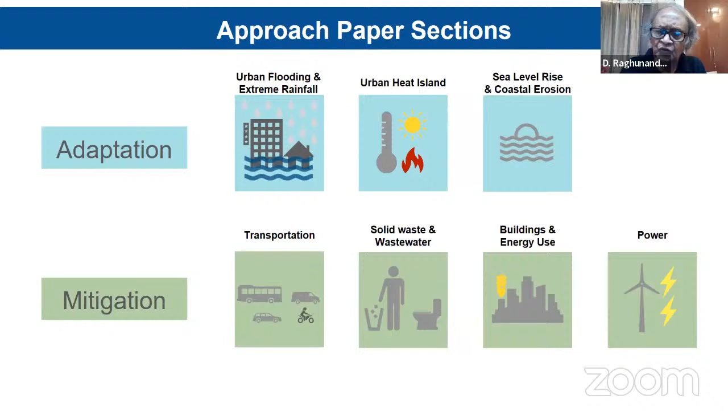So these are the different sectors that we have covered. Today I'm concentrating on buildings, including energy use inside buildings. I'm only looking at what we have described as operational emissions and energy use, not the embodied side of it.

We've been made very familiar with this distinction between embodied and operational emissions, so I don't need to go into that. I think Dr. Ashwin has explained this very well.

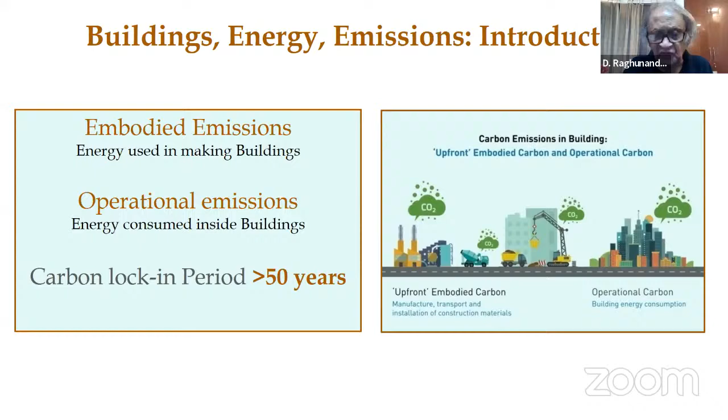We know that the building itself is a problem, apart from fittings and appliances inside it. We've heard about how different materials and different designs of the envelope need to be done. Simple observation of today's buildings shows we seem to go in the opposite direction to where we should be - we use a lot of glass where we don't need it, which only traps heat.

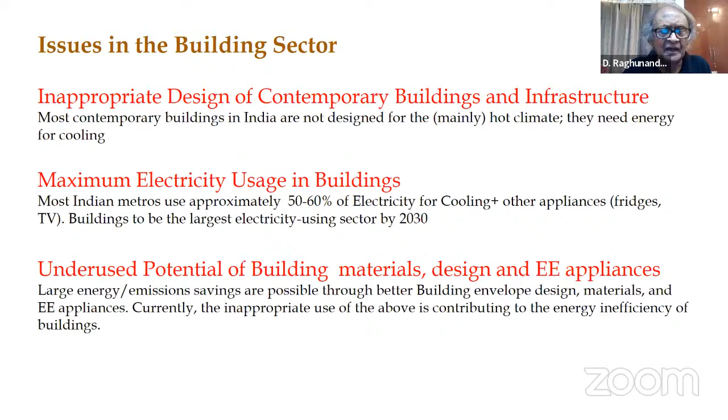The other part of it is electricity usage inside buildings. Earlier, the Eco Niwas Samhita norms, the codes, were not introduced because residential buildings were not thought to be such a big sector. But newer data suggests residential buildings may be consuming about 75% of total energy used in buildings. That has refocused attention on the residential sector, which we haven't heard much about today, so I'd like to focus a little on that.

There is a very important feedback loop between urban heat and the use of appliances, especially for cooling, inside buildings. We all know that in cities, the urban built structure - buildings, roads, and other infrastructure - absorbs heat and re-emits it into the ambient environment, which leads to what we call the urban heat island effect.

The hotter the city gets, the more you need to use ACs or other cooling devices. But the more you use ACs, they exhaust heat in exchange for the cooling they do, which adds to urban heat. And the more urban heat goes up, the more you want to use ACs, which drives up the UHI even more. So this feedback loop takes place, and we need to be conscious that reducing energy used for cooling inside buildings not only saves energy, it also helps reduce urban heat and improve livability.

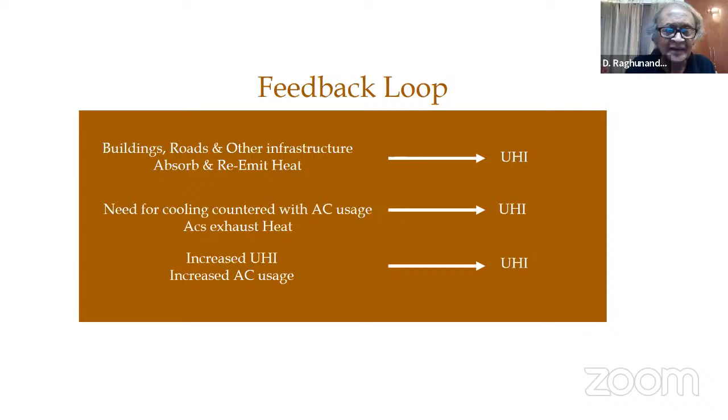Saving energy and emissions - as we've discussed, there are different aspects, embodied as well as operational. The regulatory systems are really not yet mature enough to get into this. Those doing it voluntarily, fine. Gradually we are moving towards mandatory regulations, particularly for commercial buildings. But any kind of mandates or strict regulations in residential buildings are yet to see the light of day, which may change in the coming year or so, broadening the scope of building regulations and making compliance required rather than voluntary as it is now.

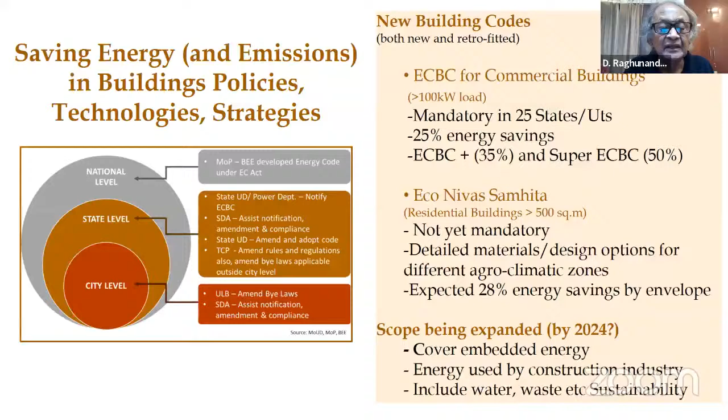There is obviously big growth in the building sector, both residential and commercial. We don't have numbers for it, but there's going to be huge demand - in Chennai city, for example, apart from residential expansion taking place at more than 10% per annum compound growth rate, commercial and office buildings are also growing at an explosive rate, given the industrial growth we're seeing in and around Chennai and the greater metropolitan area.

Emissions from buildings in Chennai are about 57% of total emissions inside the city, and I'm only talking operational emissions here, not even embodied emissions. Out of that, residential is about 31% - I'm not looking at LPG and cooking gas - and commercial buildings are about 26% of the total. So the big challenge is you've got easily more than half the emissions in the city coming from buildings, but we are not yet taking major steps to control those.

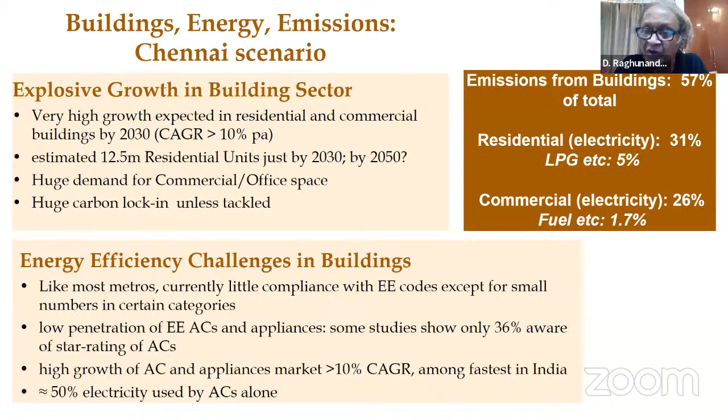Yeah, so this is a huge problem. It cannot be wished away or pushed back, and the need is for policy and tactical solutions. How do you implement what you want to achieve? Next, please.

Yeah, so what we have proposed in our study, I'll run you through those very quickly. The first is with regard to building envelopes. The Chennai Climate Action Plan has proposed targets in which they have combined retrofitting as well as new buildings, and they have set some targets, which you can see the numbers there.

We feel that perhaps this is not particularly wise from an implementation point of view. Firstly, we should look at commercial and residential buildings separately, because implementability is different, compliance with regulations is different, and we should also look at new buildings and retrofitted buildings differently, especially in the residential sector. If retrofitting involves fixtures and lighting etc., that's easier, but if it involves changes in the envelope, that's not easy to achieve at all. So the strategy for implementation needs to be segregated into commercial, residential, as well as new and retrofitted. That needs to be looked at.

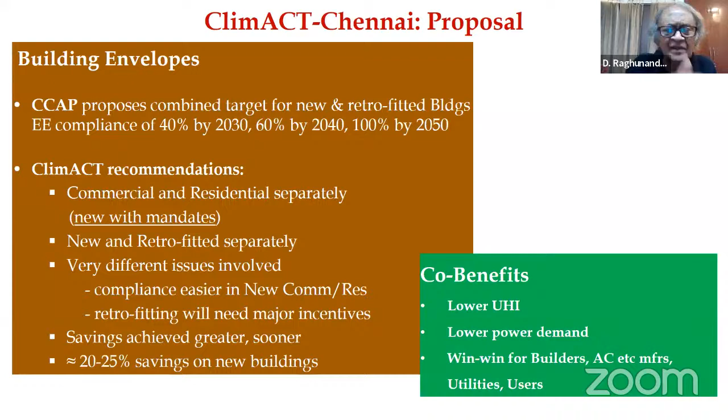Yeah, so now I'd like to look at ACs and other appliances. We haven't looked at that so much. We've taken for granted that these efficiencies are easy - you look at 3-star, 4-star, 5-star, you put them in and you will achieve that. However, we feel that actually the amount of energy savings and emission savings from air conditioning is quite underestimated.

The Chennai Climate Action Plan has estimated something like a 3% saving on emissions from energy efficient ACs. Now, we think this is a fairly gross underestimate. We think it's closer to 10% overall.

And therefore, if you have estimated properly, there's an incentive for a much greater push to energy efficient ACs. For instance, you can have mandates for new buildings which say this is the minimum efficiency your air conditioners should have. Something else that has happened in Delhi is the electricity distribution company is offering discounts and incentives to all residential building owners, saying we will replace your air conditioners with higher star rated air conditioners, and we will help you with refinancing by building the EMI into your electricity bill. And they are doing this not for altruistic reasons, but because it lessens their load, the requirement to purchase power from other states, etc.

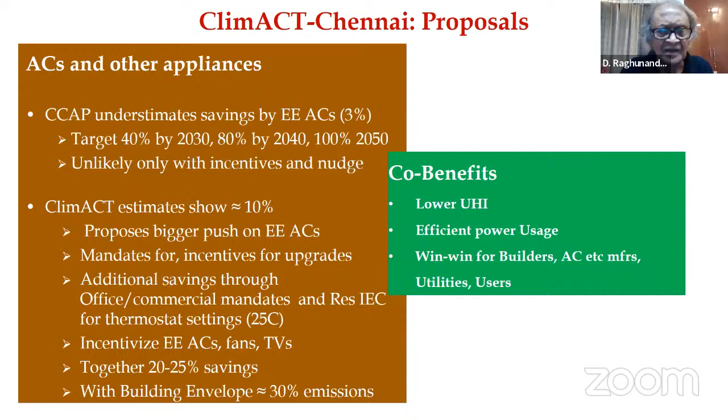So I will close my brief presentation here. I think what we have done through our study is to explore these options and highlight that the benefits are obtainable through improvements in building envelope, particularly in residential buildings.

Commercial buildings are likely to follow their own logic and comply with norms sooner than residential buildings. Governments may also hesitate to enforce norms on residential buildings, but all our estimations show that the payback period through energy savings on your expenditure will pay back within a not very long period of time—anywhere between 5 to 7 years—which is not much, and will save a lot of emissions and energy and improve livability in the city through lowering the urban heat island effect.

So I'm going to stop there, and we have about 15 minutes for any Q&A that may come up.

Our old friend Michael, who's a faithful follower of these webinars, I thank him for his continued presence. He will give not only remarks here, but later by email. I'm sure he will give us a lot of insights and suggestions in the future.